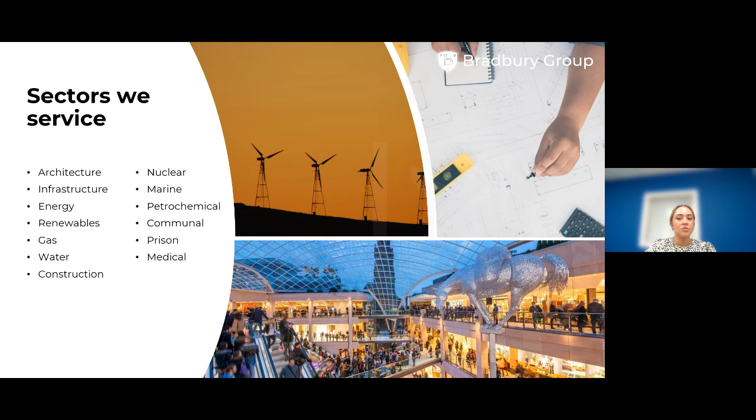So onto the CPD, why are fire doors so important? This section will provide a bit of an overview of the importance and terms you may have heard in this industry before. We all expect and have the right to feel safe and protected should a fire break out. Unfortunately, this isn't always the case. There are many elements that make up the fabric of a safe building, and just one element can lead to tragedy, causing death and serious injury.

Fire doors are part of an overall building's passive fire protection system. This is an essential requirement for all public buildings, offices and factories, but I'll get to this later. There are also certain domestic situations where fire doors are a requirement, including flats, doors leading to integral garages, or where a dwelling has a second floor habitable room, such as a loft conversion. Where this applies, rooms are compartmented in order to prevent the spread of fire, keeping the fire within the compartment within which it starts, protect the occupants and contents of other compartments, and provide a safe, protected means of escape for any occupants.

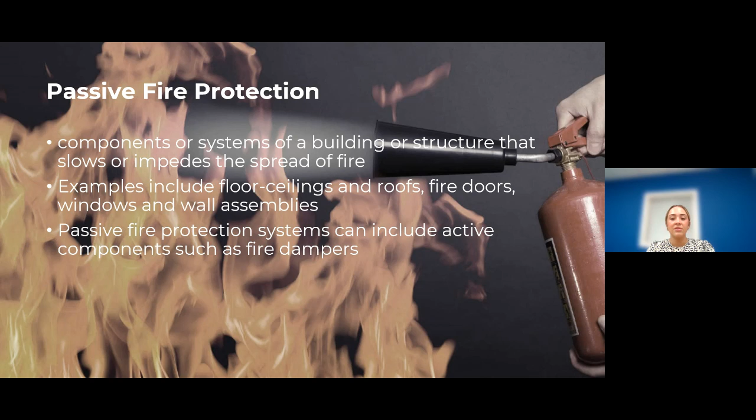Passive fire protection are components or systems of a building or structure that slow or impede the spread of the effects of fire or smoke without system activation and usually without movement. Examples of passive fire systems include floors, ceilings and roofs, fire doors, windows and wall assemblies, fire-resistant coatings, and other fire and smoke control assemblies. Passive fire protection systems can include active components such as fire dampers.

So fire safety legislation for England and Wales, Scotland and Northern Ireland highlights the legal responsibilities of reducing the risk of fire spreading within a premises. Penalties for failing to comply with the legislation carry unlimited fines or a prison sentence for organisations and landlords. So existing buildings other than domestic properties are governed by the requirements of the Regulatory Reform (Fire Safety) Order 2005, otherwise known as the RRO or Fire Safety Order, FSO.

The responsibility for fire risk assessments in all non-domestic buildings falls to the responsible person. This also includes common parts of flats or houses of multiple occupation. The responsible person must carry out a fire safety risk assessment and implement and maintain a fire management plan. Legislation requires fire doors to be maintained correctly. Regular fire door inspections, particularly for those in high risk and high usage areas, will highlight any fire door maintenance or replacement issues that need addressing.

When carrying out maintenance on a fire door or door set, it is important to remember that under the building regulations or the Regulatory Reform Fire Safety Order, proof of compliance of fire doors can be requested. For this reason, the original fire door specification should be adhered to and only compatible components used to avoid challenges. This rule applies to all non-domestic buildings, including business premises, parts of residential dwellings used for business purposes, charities, contractors, and accommodations for paying guests.

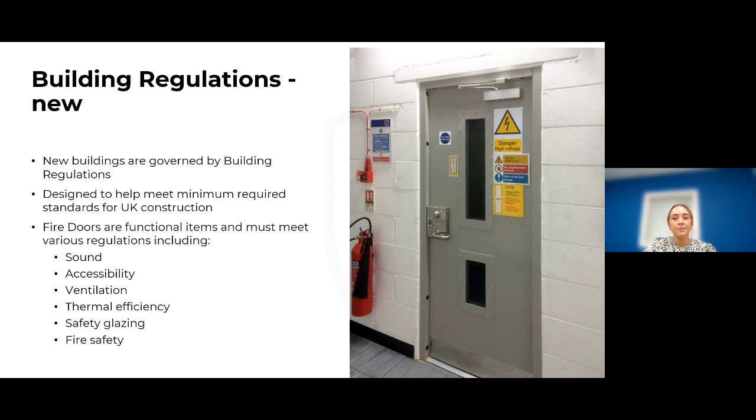The Homes (Fitness for Human Habitation) Act 2018 requires landlords in the private and social sectors to ensure that their properties, including any common areas of the building, are fit for human habitation at the beginning of the tenancy and throughout. To achieve this, landlords must make sure that their property is free of hazards that mean the property is not reasonably suitable for occupation. The hazards include exposure to uncontrolled fire and associated smoke, highlighting the need for effective fire doors that prevent the spread of smoke and fire.

Where there are areas in residential buildings that people are using as workspace, there will be obligation for the safety of those employees under the Health and Safety at Work Act 1974. Employees must be able to leave their place of work safely, which means maintaining the escape routes used in the event of fire through the use of correctly specified and installed fire doors and smoke control doors.

Third-party certification of fire doors and door sets provides evidence to the responsible person that everything reasonably practical has been done to demonstrate the ability of the fire door to perform in the event of a fire. The fire door certification process provides proof of the fire door or door set's ability to hold back the spread of smoke and fire and the consistency of its manufacture.

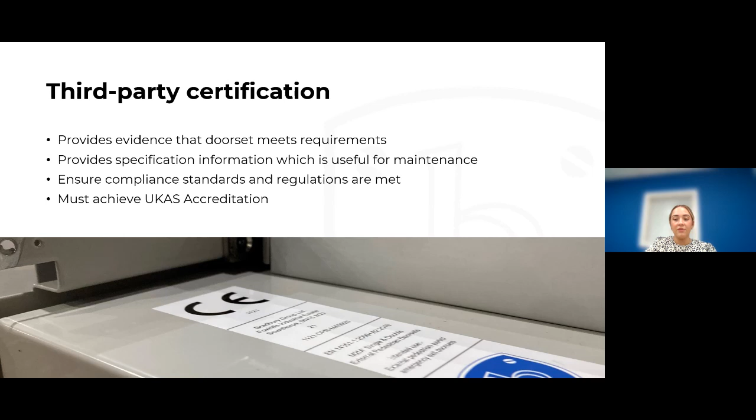Fire door third-party certification also provides vital specification information for component parts to enable the fire door or door set to be maintained in line with the original spec throughout its lifespan. This is crucial for compliance with both the building regulations and the Regulatory Reform (Fire Safety) Order. All third-party certification must be UKAS accredited.

So moving on to fire door designs. You often hear the term door or door set, but do you know what the subtle differences are between the two in the industry? Well, the term door refers to the leaf and frame, but does not necessarily include hardware. Doors tend not to be supplied as a complete package. The term door set actually refers to the full package from the leaf and the frame to all the hardware and seals. Door sets tend to be supplied already in the frame, whereas doors can be supplied separately.

So what is a fire door set? A fire door set is a complete unit consisting of a door frame and a door leaf or leaves, supplied with all essential parts from a single source. This means that a fire door set is supplied as a complete unit from one supplier so that it is fully fitted up and finished direct from the manufacturer, fitted with all compatible components and glazing, and is pre-assembled in the factory.

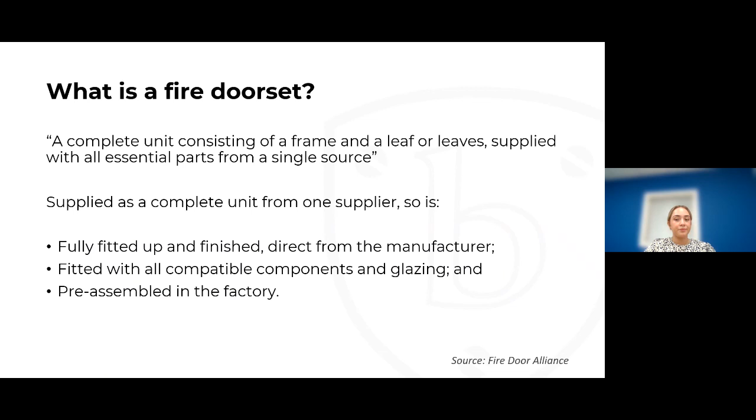A fire door assembly is a complete assembly as installed, including door frame and one or more leaves, together with its essential hardware supplied from separate sources. This means that the components can be sourced from many different manufacturers or suppliers. So door sets, along with walls and ceilings, are designed to resist the fire for a specified period of time.

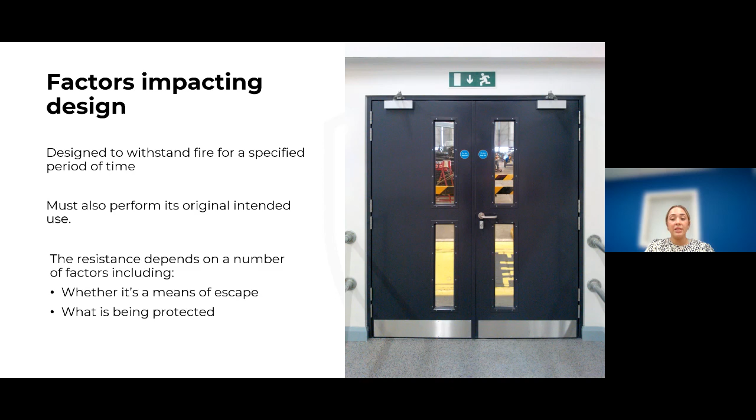The simple purpose of a fire door in everyday use is just as any other door. However, since a breakout of fire is never predictable, the fire door, unlike any other door, must perform its prime purpose to protect lives and offer protection to the remainder of the building and to other buildings. The required resistance to fire depends on a number of factors. Typically, a fire door with the rating 30 minutes will be enough for doors leading to fire exits, but higher ratings might be needed if you're trying to protect the property or certain assets.

Fire doors are a critical part of a building's passive fire safety strategy, and they are as important as testing the battery on a smoke alarm or checking the pressure of a fire extinguisher. Fully functioning fire doors can help to prevent the spread of fires and provide people with a safe route to evacuate. Compartmentalisation helps to starve the fire of oxygen, eventually subduing it.

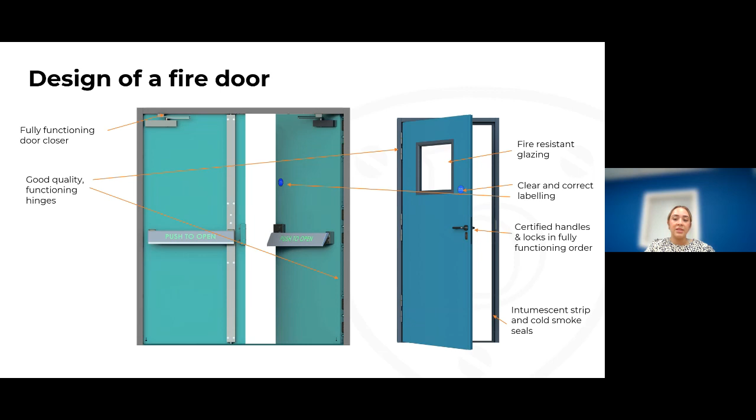When choosing a fire door, ideally you should ensure that the door has a closer and fully functioning hinges. Check that the door comes with the correct signage and labelling. Check that the door set comes with fire resistant glazing, and check that the door set comes with certified handles and locks and that the handle is fully working. Some door sets come with intumescent strips and cold smoke seals where appropriate, and these help to resist the passage of smoke and fire to other compartments. It is recommended that fire doors are regularly maintained to ensure compliance and negate risk.

Escape doors are not subjected to the same test criteria and do not need to be fire rated. However, there are certain criteria an escape door should meet. So escape doors must meet either BS EN 179 emergency escape or BS EN 1125 panic escape standards. These differ depending on the hardware installed on the door.

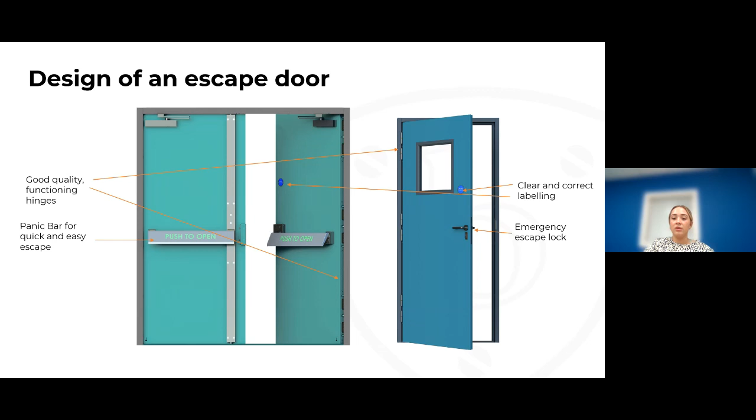So for emergency fire exits, doors should be fitted with a panic bar or panic pad or even a lever handle, providing an easy and a fast exit from a building. It is once again recommended that escape doors are regularly maintained to ensure compliance and negate risk.

So moving on to our testing and certification of fire doors. So how are they tested? Doors are tested as a complete assembly, including the frame, leaves and associated hardware where required. It is produced and installed to the same standards you would expect in a real building and is subjected to testing at 1100 degrees for a sustained period of time.

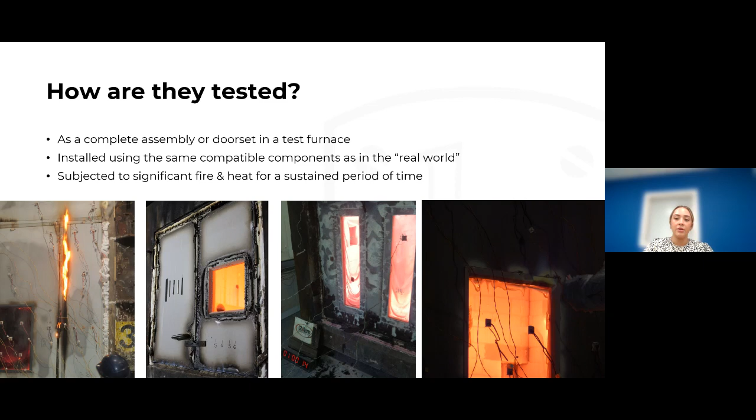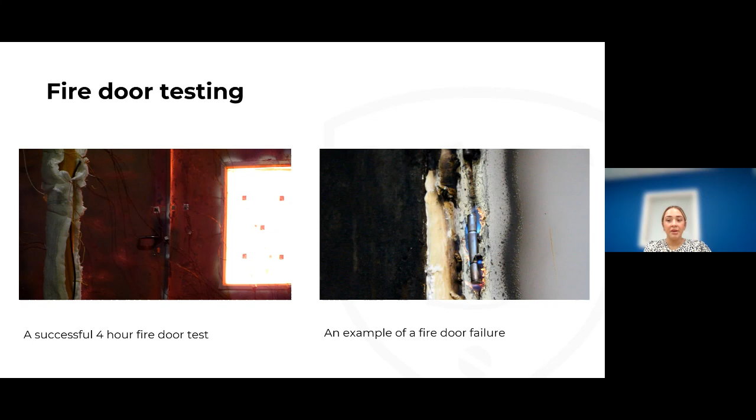So in these videos, the video on the left shows a door being subjected to testing by Warrington Fire. As it goes up to the close-up, you'll see that the door is hooked up to various sensors monitoring the external temperature. So the focus is on potential areas of failure, for example, the gaps around the doors. This door has been undergoing testing for over 4 hours, meaning it has achieved a rating of FD 240.

And then the video on the right shows what can happen if the door does not meet the testing requirements. The video shows the hinge area failing on the door. You can see that it's melted through.

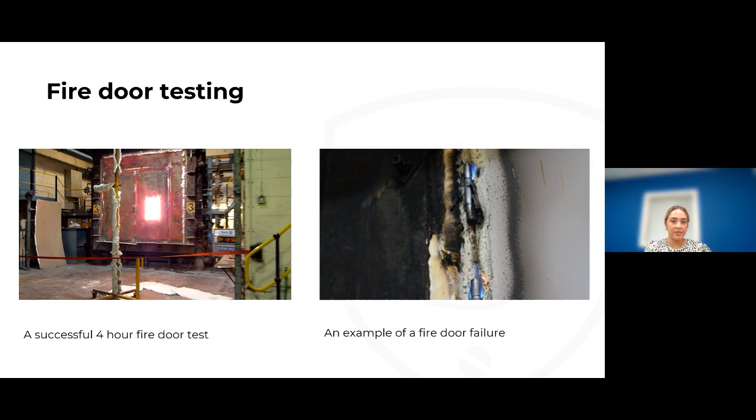So internal versus external standards. Internal doors must be tested to BS 476-22 or BS EN 1634-1 to be compliant. These tests simulate how the doors will function in a fire, and the doors are then rated in minutes with a prefix of FD. Currently, internal doors have no requirement for CE or UKCA marking.

External door sets must have CE marking to be fire door compliant with the EU and are covered by the harmonised product standards. Because of Brexit, it is now a requirement for door sets to also meet the UKCA designated product standard mark for all doors sold within Great Britain. At present, internal doors do not have to comply with the harmonised standards and are therefore not CE or UKCA marked.

However, the standard for external pedestrian door sets, EN 14351-1, and fire-rated pedestrian door sets, which is EN 16034, are both harmonised and designated, which means it is a requirement to be CE and/or UKCA marked when placed on the market. It is the responsibility of the person placing the door on the market to ensure it meets compliance.

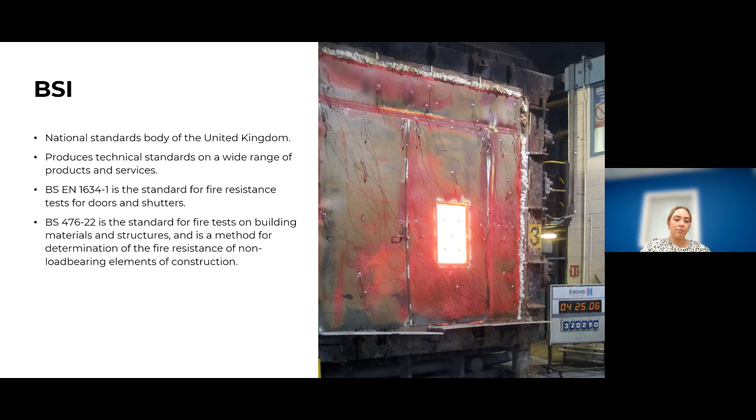So Certifire is an independent third-party certification scheme which assures the performance, quality, reliability and traceability of fire protection products. It is an internationally respected mark of fire safety and one of the most authoritative in the industry. Certifire provides regulator, specifier, customer and end user confidence in stated performance of the products tested, giving assurance as to the performance of the products.

It is most used by manufacturers of passive fire products and systems as it offers the opportunity to differentiate products and processes from non-certified equivalents, thus helping to access markets worldwide. The scheme can also be useful to architects, specifiers, contractors and building owners as Certifire provides assurance that correctly installed passive fire protection products and systems will perform as required, thus avoiding costly mistakes and dramatically reducing risk.

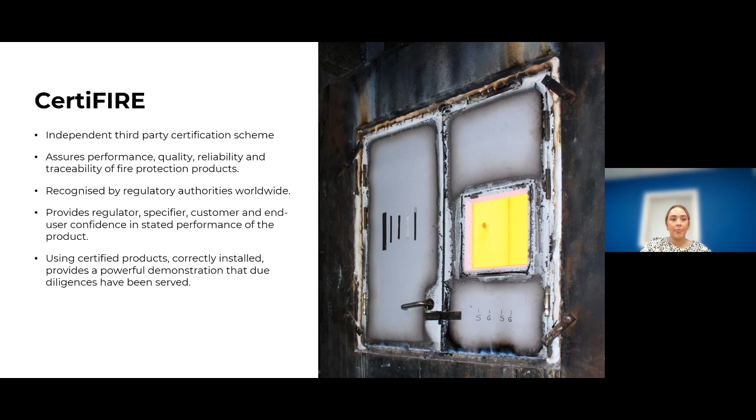So CE on external fire rated doors first came into effect on the 1st of November 2019 and is the conformity mark used by the EEC. In order to obtain a CE mark, doors must be third-party tested and their continued manufacture must be audited to ensure they comply with external door regulations in BS EN 14351-1.

The testing measures the door set for air leakage, water tightness, resistance to wind load, thermal transmittance, acoustic performance, impact resistance for door sets with glazing, ability for exit devices on emergency escape doors to release, and then declarations on radiation properties and any dangerous substances. In addition to this, BS EN 14351-1 allows tests for voluntary door characteristics that may demonstrate extra performance features. These would include features such as strength and durability tests.

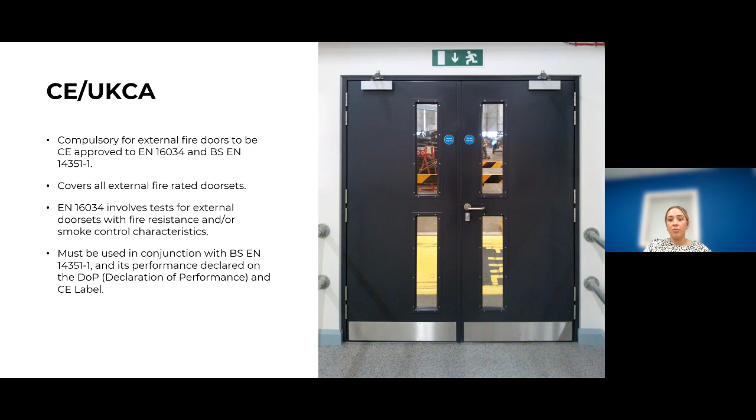So moving on to fire and security. So door sets can be supplied with both fire and security certification, but there are limitations in the fire integrity as well as the hardware and additional options available. The advantages of installing a dual certified door is that it can perform multiple uses. So for example, an external fire door can achieve a security rating of LPS 1175 SR4.

However, depending on the design, there are some limitations on the amount of time a door can withstand fire, and an SR4 door is limited to 120 minutes fire resistance.

So moving on to our case study, which might be familiar to a few people. So the 2022 FIFA World Cup tournament was held in an Arab region, taking place across a 21-mile radius of Qatar. In total, there were 8 stadiums with a total capacity of just under 400,000 people, which are linked by a metro system. Each stadium has a different striking design, with some being powered by solar farms and equipped with cooling systems or an outdoor air conditioning.

So the Bradbury Group was approached by HBK Contracting Co. to supply over 600 doors with high levels of security and additional fire integrity. The project required a quick turnaround, with a total requirement of 649 doors across the different stadiums. 422 doors were SR2 and 227 of the doors were SR3, to be supplied directly to Qatar for installation.